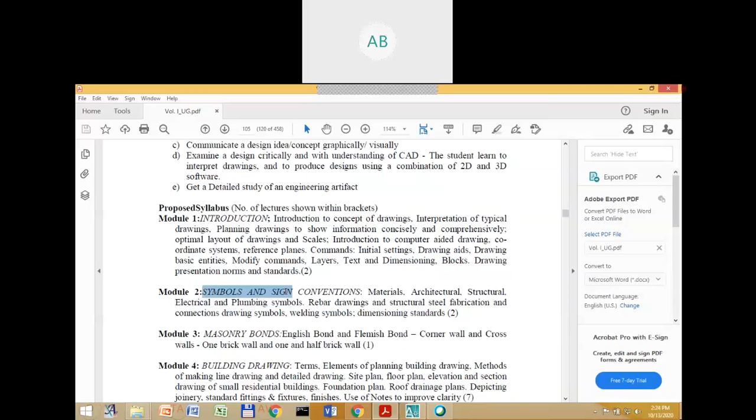So I thought I should again go back to the very basics of these drawings. If I look at your syllabus, in module 2, from here we can start our drawings. It says symbols and sign conventions, so there itself we can start to draw. Actually, in every class, I do not have to keep teaching you the same thing. So here is what I am going to give you: some exercises particularly on symbols and sign conventions, and in this exercise itself, I will draw a few with you, and then you also have to do it. Is it clear?

Hello? Yes, sir. Okay. And I ask everyone to do it, okay? Because from here I cannot really see what you are doing back there.

So those who really want to learn, you have to install the software and start practicing the commands I told you. The commands, you don't have to do arbitrarily. If you just pick up one assignment, you can practice those commands. So let us start with

this kind of symbols today. I am going to give you one exercise in the WhatsApp group, and from there we will do it together. I will do a few for you, but the remaining you have to do, including how you are going to give the text and how you have to draw according to the dimension.

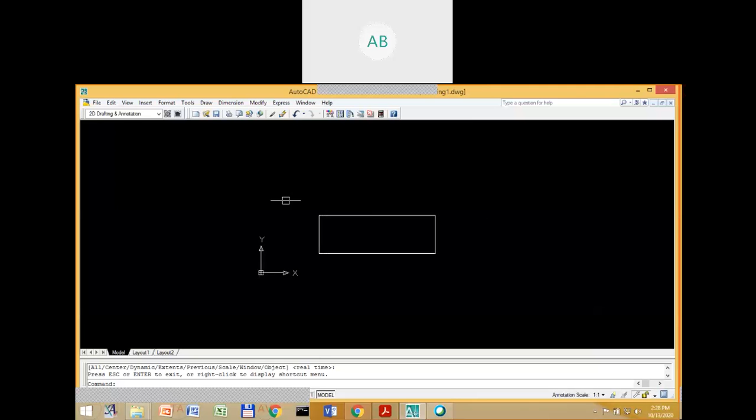So first symbol is our brick. As I said, in order to symbolize this in AutoCAD or in CAD drawing, there is an option called hatch. So you type H for hatch and then enter.

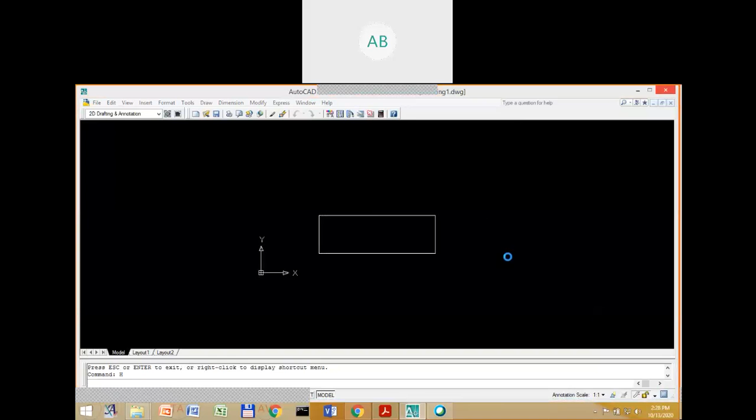It says add pick point, pick an internal point. So I click there and I click inside this rectangle, and then enter.

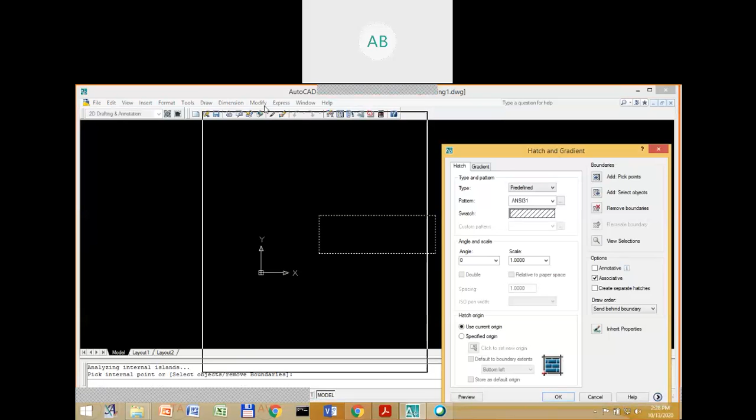Then you can see the preview somewhere. So where can I see the preview? Just a moment. Here, preview. Okay, so if I click at the preview, I see only white patches. No? So that means I have to change the scale.

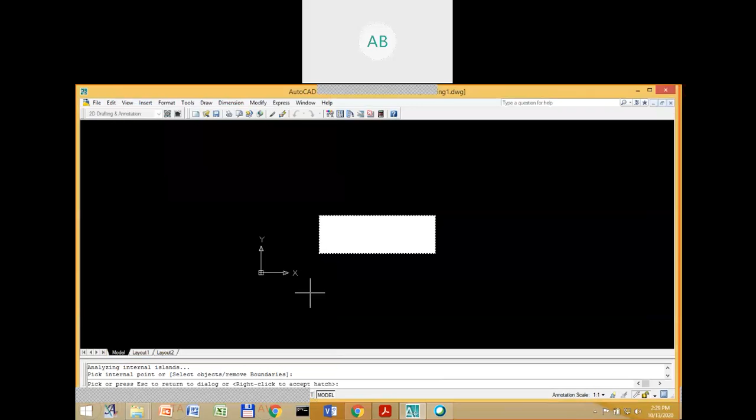I have to change the scale again. I have to go back. For that, I again press escape. And then in the scale here, it is by default 1. So let us change it to 10. And then again see the preview.

It has changed a little bit, but it is not enough. I have again to change the scale. Let us do it 100 this time. Okay, so this is little bit okay as far as scale goes. But in terms of the symbol, this is not the correct symbol for the brick.

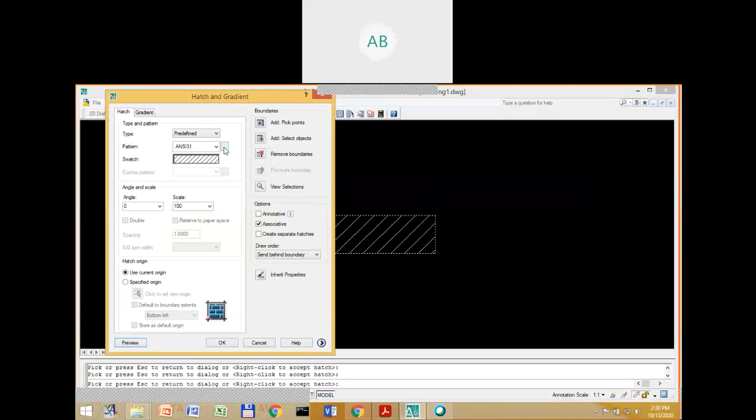You have to check another symbol here. You can open up the catalog by clicking on here. Okay, so you see there are different symbols.

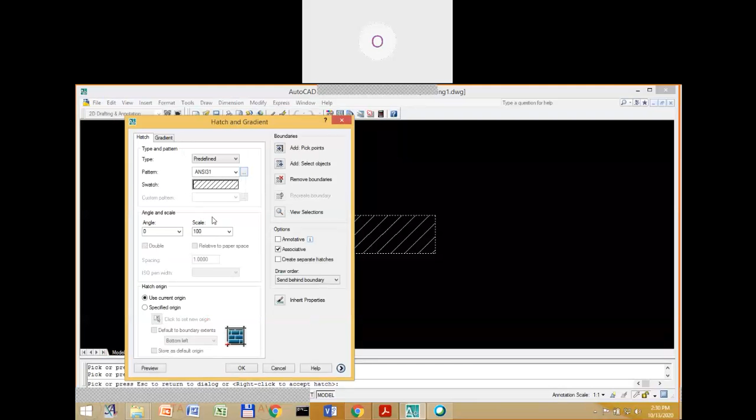Sir, how do I change the scale, sir? Mine is not showing where the scale is, sir. So it should be- which software are you using, by the way? AutoCAD 2021, sir. So I'm very confused, I have to see your interface, only then I can tell you.

Okay, sir, I will share it. At the end of the class, maybe I will look into it. Actually, it should be there somewhere, because ultimately it is an advanced version only. So anyway, I'll check your thing later in the class. Maybe the class, I don't want to really stop now. Okay, sir, or otherwise you will have to share your screen, then only I can tell you. Okay, sir, I will share my screen. Let me finish the class, and after that I will look into it. Okay, in the scale.

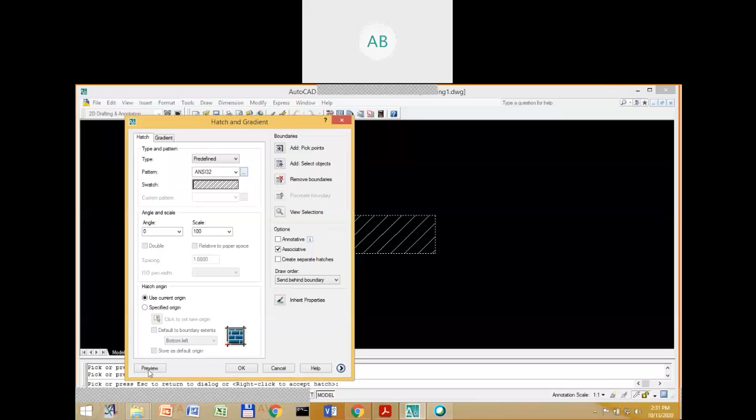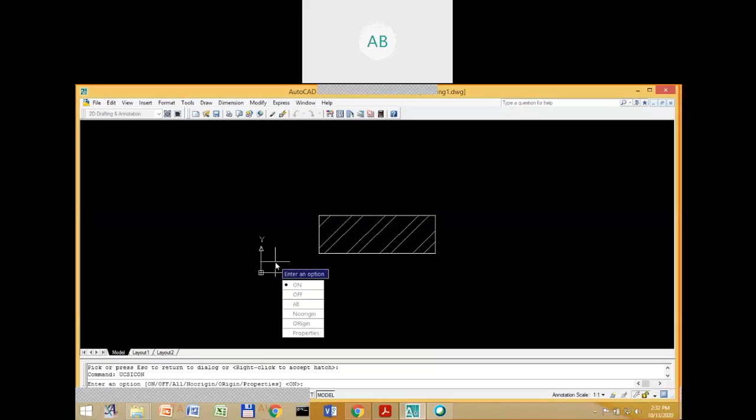Okay, so this is my UCS. If I think I can switch off this UCS icon command, and then off. This is gone. Then zoom extend, and then again zoom 2 times, I go to zoom dynamic.

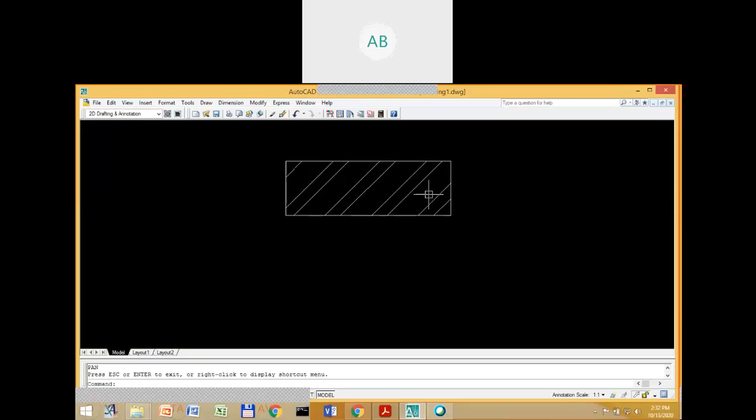Okay, so I want you to draw the symbol as well as you will have to write it on the left side. So for that you will have to create a table. How we are going to create a table? It is simple, just draw 2 lines. One line from here, put F8 here, then another line like this.

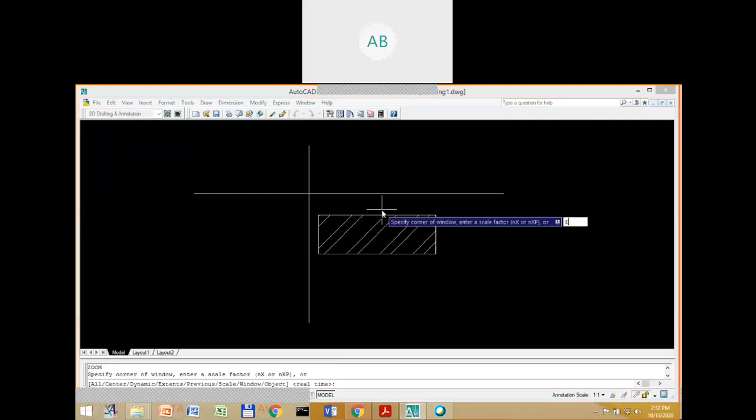Okay, on the left side we are going to write the text. For writing text, you type T.

This is a single line text, remember. So here I write BRICK, in capitals. Okay, so the font is actually the kind of font used here.

It is not fixed, you can change it. You can also change this height of the font. So if I want to change the font style, I can go and find some of the styles from here.

Let me pick up... wait a minute. You can see my screen, no?

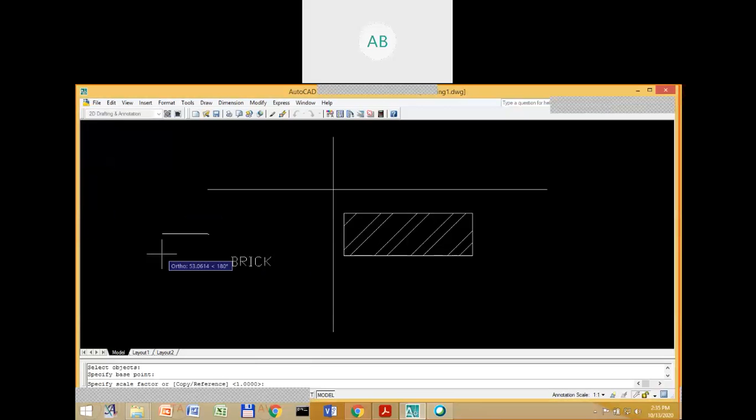In this case, what should I do? I should change the scale again. There are 2-3 ways how you can change it. You can directly type the scale command SC and enter, and then select this object, and you can use a scale. Suppose I use a scale of 50 now.

So this has increased. I want to move it to a little bit higher place. Pick it up here and then place it here. This is brick.

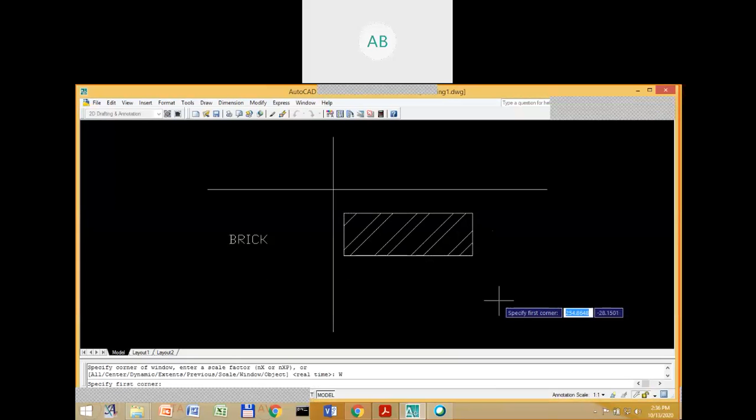Just a moment. Okay, so this is for brick.

On the top of it, you have to write two other texts. So I copy this text here, and then... okay, how will you copy it? I want to copy this text to here on the top.

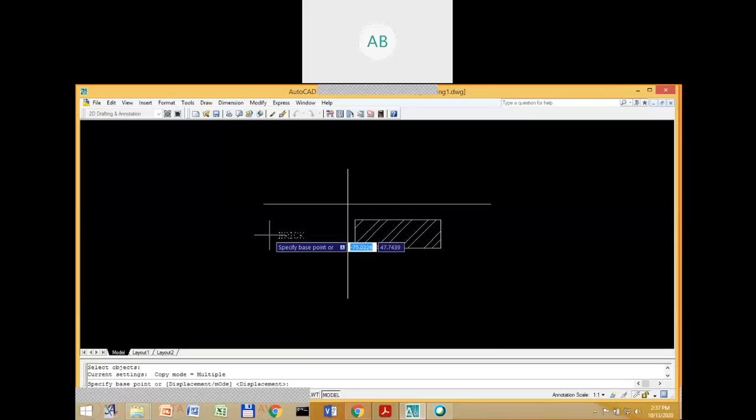For that, I type CO for copy. I pick up this text, select this base point, and then manually drag it somewhere here. Enter. But this has to be changed.

What is this has to be changed? It has to be written as material. So this brick needs to be changed to material, right? So for that, I will type another command, ED.

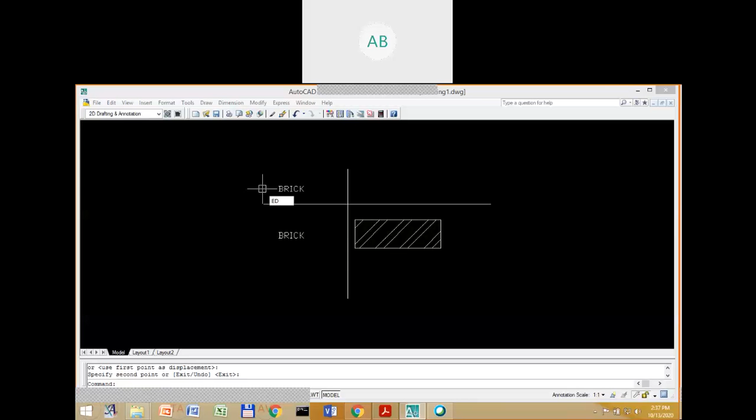So ED, write down in your notebook. ED stands for editing, editing the text. So ED and type enter, select an annotation object. I pick up this. So here in the brick, I will write what?

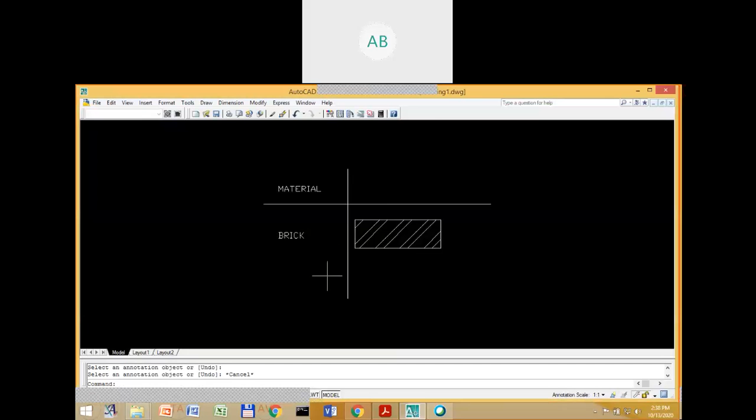Material, material. Okay, again I copy this and then I bring it here. So this side is again ED and this should be symbol. SYMBOL, symbol.

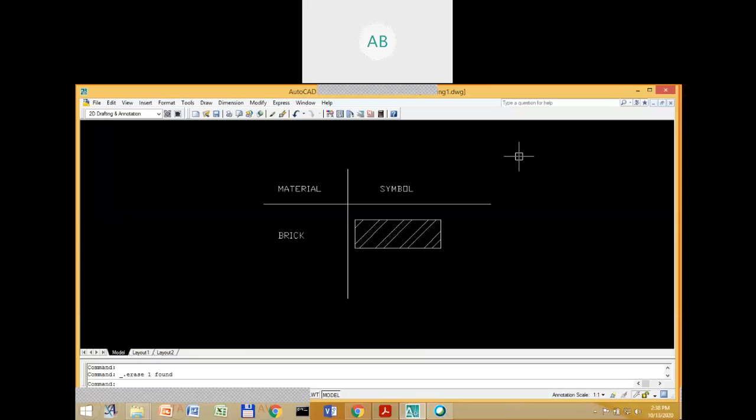Oh. Symbol. Is it okay? Can you hear? Can you see? Students?

Sir, yeah okay. So now today you have learned how to edit the text. So in order to edit the text, the command is ED.

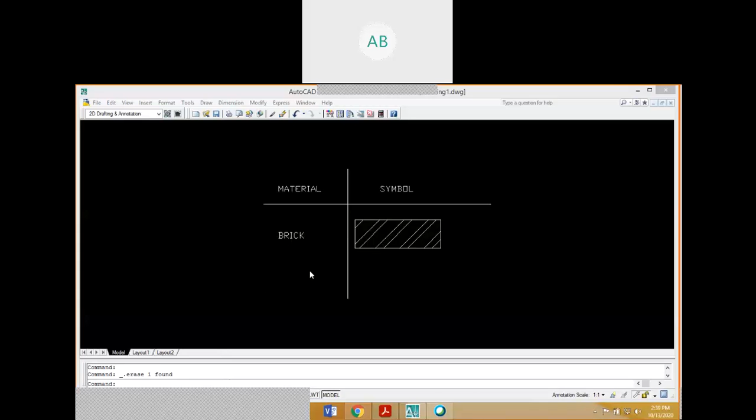Now I have to make a copy of this rectangle and then at the same time I would copy this text together. Okay.

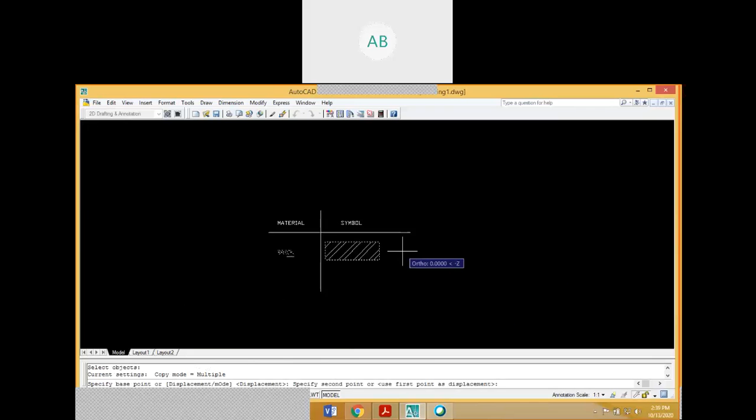So for copy I said CO, select object. So this is one object, I only select the rectangle. Okay, my base point, I can pick up any point here, and then I simply type this much is 50, around 50, so I type 200 and then enter. This is my second rectangle.

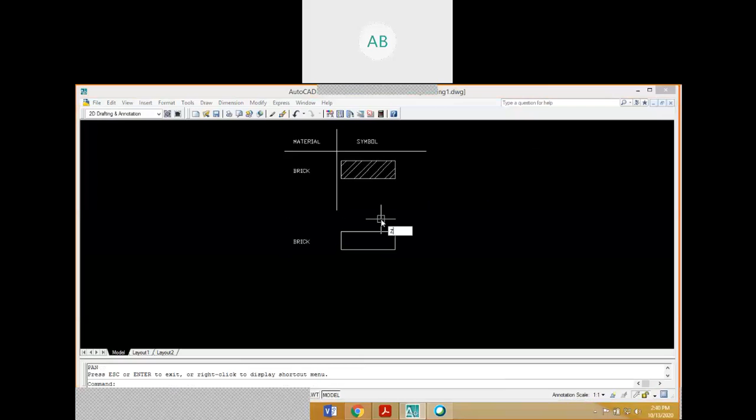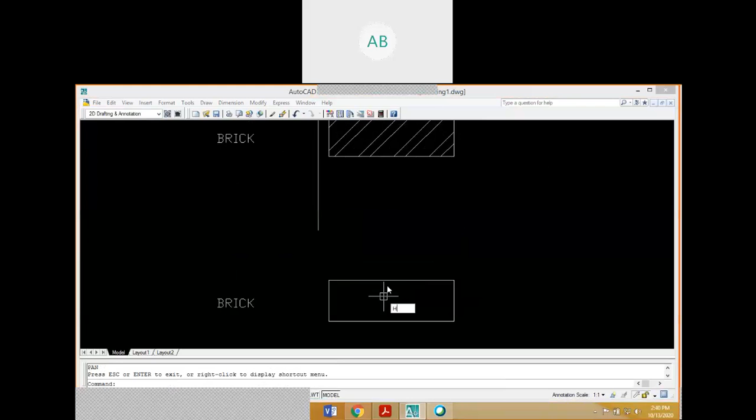Okay, so again I have to use a kind of hatch for concrete. What is the command? H. I go there, then other or predefine this one, concrete, ARCONC, concrete.

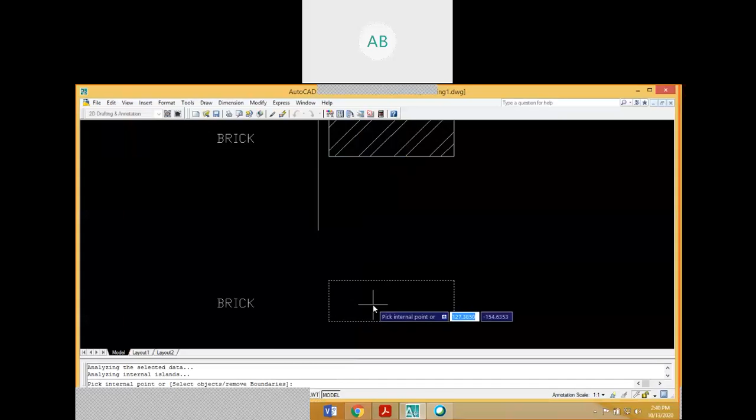I pick OK, then add pick point. I select here, then enter. You can see the preview, but it cannot be seen because of the scale.

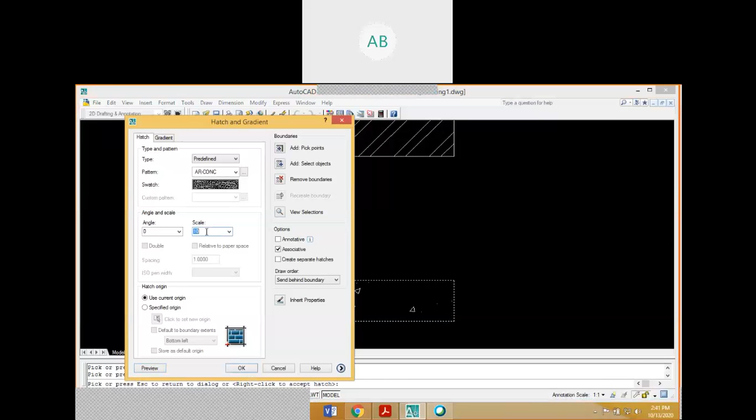Again, I reduce the scale to 1, then I can see it, but 1 is too small. Maybe I should change it to 10. Preview, maybe I should reduce it a little bit to 5. Okay, so this is for concrete.

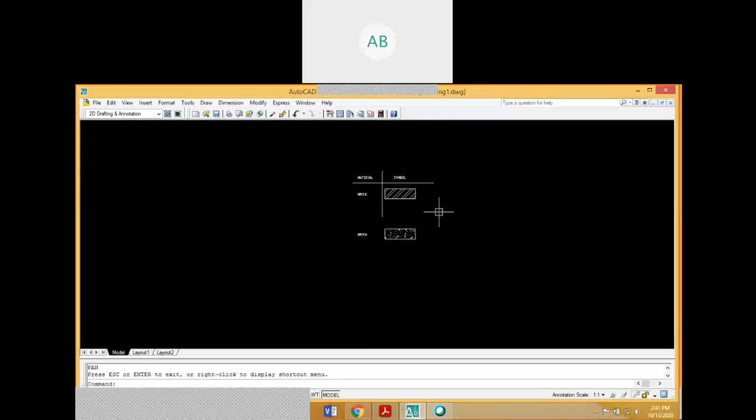Okay, I move it up a little bit, maybe 100. Oh sorry, move it on the y-axis. Let's type 100.

And on the left hand, on the brick, I type concrete. C-O-N-C-R-E-T-E, concrete. Okay.

So can you do it now for the others? Yes or no? Yeah, yes. So how about other students? Are you all understanding?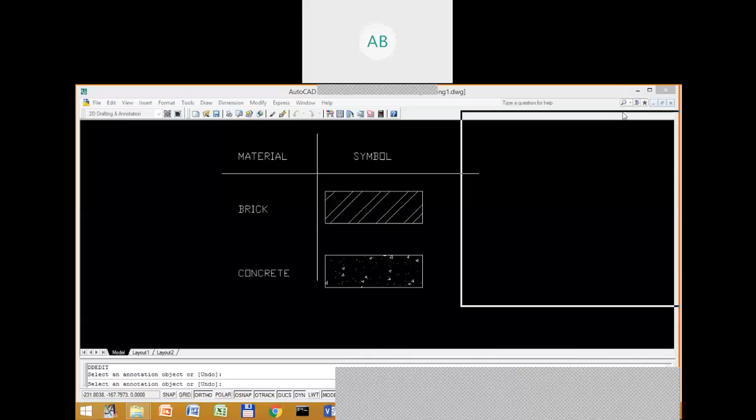Then you have to save this file. Save it. Save it somewhere as tutorial on symbol. Okay, so see your WhatsApp file.

Just a moment. In there, I have given you the symbol for materials.

So using AutoCAD or CAD, you have to draw plaster and plaster products. Where can you find this? Just check. Sand, then natural or reconstructed stone. So if it is a stone, which symbol are you going to use?

These symbols will be useful when you are going to show the cross-sectional view. That means when you are going to cut a particular object and show it in the drawing. Okay, if it is wood, this type of symbol.

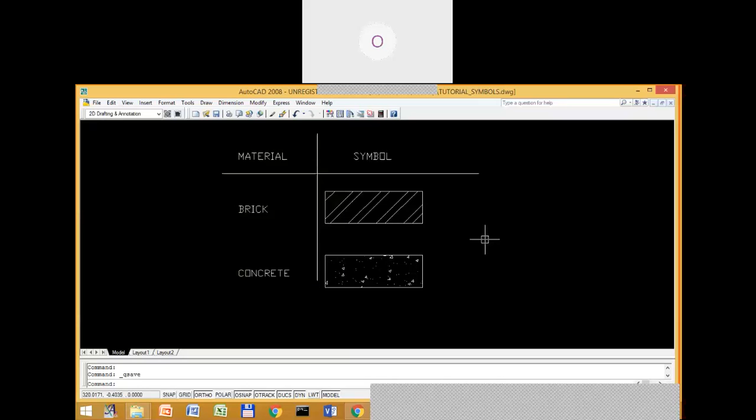Concrete, sir, grid point or the snap point. Can you share me that screen? Okay, let everyone see what the problem here is. He is facing a problem, so let us try to see what it is. Please share the screen, let me stop this.

Yes sir, can you see it? Go to share content, below.

Sir, can you see it? Wait a minute, we are starting to see. Just a moment. But why is it appearing to be very small? Can you make the screen bigger?

It's because of the scale. You press escape. Yes sir, escape, I pressed it. Now can you do it again? Yeah, just remove whatever content is there inside the box and start again.

Delete it. Is it a rectangle? Okay, type H. Yes sir, and then now it goes like this.